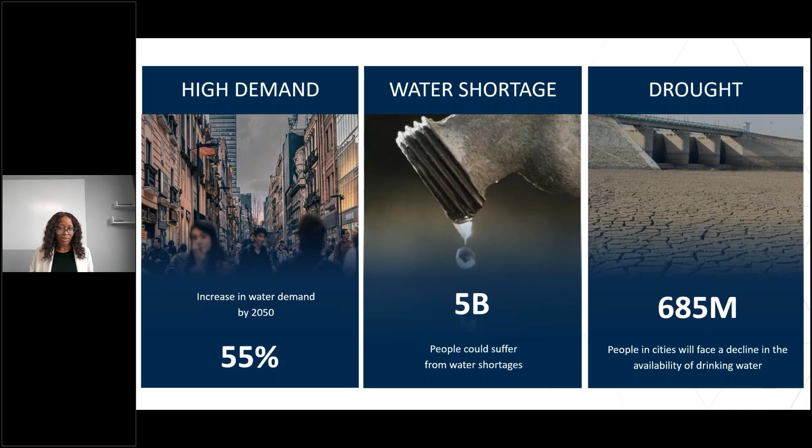We have seen similar situations before. Many people have stored water bottles at home. I also have about 3 buckets of water stored in my home because of that. And we have also witnessed people lining up with buckets in Cape Town due to scarcity of fresh water.

So in South Africa, also floods, climate change, and we've also seen what happened in Hammanskraal with the wastewater treatment plants, because of aging infrastructure. We also have problems with stormwater management and population growth affecting most people. Many existing water systems are outdated and need modernization. And we have rising sea levels, extreme weather conditions, and changing precipitation patterns that impact our water infrastructure resilience.

The increasing population strains water supply and distribution networks. It is crucial to balance water availability, environmental impact, and economic viability, especially with a lot of new residential developments. I've also attached the CSIR link for the latest information about extreme rainfall conditions. Most people are affected, homes collapsed, damaged bridges, and extensive damage to infrastructure, homes, and even vehicles. We've seen that also happening in KZN, KwaZulu-Natal.

The combination of rising costs, an aging workforce, deteriorating infrastructure, and impacts of climate change has made the task of managing our finite water resources one of our great present-day challenges. One that requires intelligent planning and operational efficiency. As an expert in water management, the world is looking to you to get this right.

And whether the challenge is too much or not enough, Autodesk is here to help you manage every drop with comprehensive technology for all your water infrastructure needs. From stormwater to wastewater networks, treatment plants to distribution systems, asset management to data analytics, we can help reduce risk while delivering reliability, dependability, and performance.

By utilizing Autodesk's end-to-end software solutions, you'll find efficiencies spanning all phases of the water asset lifecycle: planning, design, construction, operations, and maintenance. Autodesk's digital modeling tools and cloud-based solutions support increased collaboration, while reducing design time and rework, helping you create, analyze, and manage a resilient water infrastructure more efficiently and with better quality.

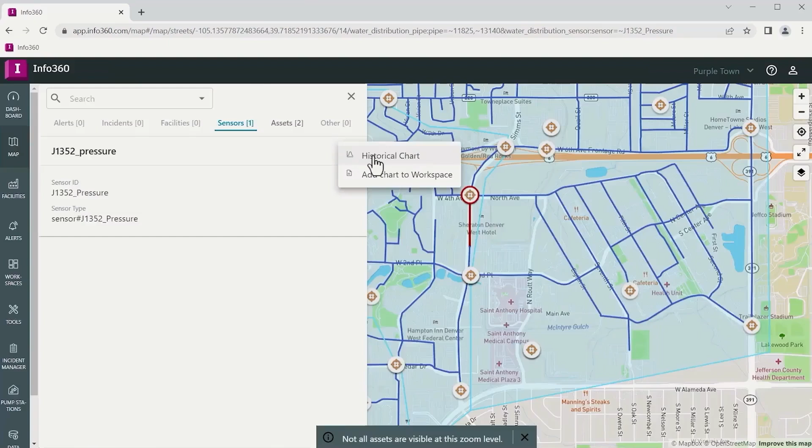Optimize land use with advanced design tools for sustainable drainage. Limit environmental and community impact with improved stormwater and wastewater planning and management. Deliver reliable and safe drinking water through better analysis. Improve operational efficiencies and system reliability through data analysis and optimization. Make informed decisions with streamlined asset condition, risk, and rehabilitation planning.

These comprehensive technologies will help you get better, more desirable outcomes to ensure that water is everywhere it needs to be.

Okay. We have discussed various problems, and I believe we all need a smarter way to manage our water systems. The Autodesk vision platform is to deliver full water cycle, life cycle management for smarter, more resilient and sustainable water systems.

This includes planning, design, construction, operations, and monitoring of our water systems without having to do a lot of rework and making a lot of assumptions in our Excel spreadsheets due to lack of information.

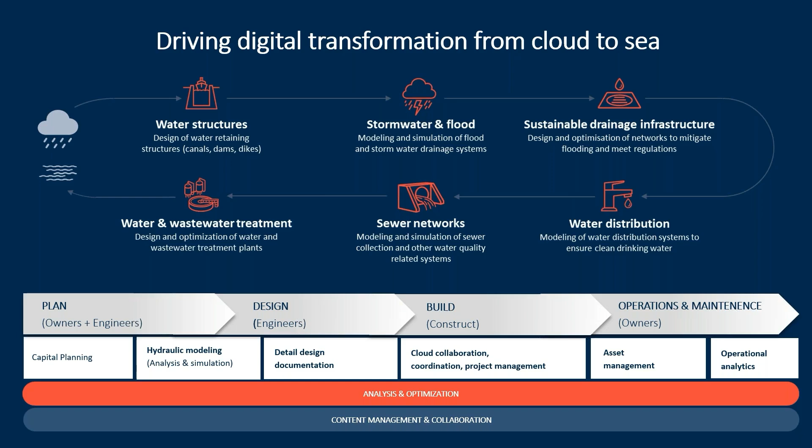With the integration of solutions from Autodesk and the acquisition of Water Infrastructure Solutions, we are now able to cover the entire water value chain, including water structures, stormwater and floods, drainage, water and wastewater, treatment plants, sewer networks, and water distribution. This enables us to support the entire water cycle from planning and design to construction, operations and maintenance, as well as the entire asset life cycle from the single drop of water to digital operations.

And for water structures, our networks and treatment plants, we have a solution through digital transformation. Some of you may be familiar with AutoCAD, Civil 3D, Revit, Inventor, Plant 3D, Navisworks, and even InfraWorks for modeling, designing, analysis, and optimization. However, there is increased collaboration and integration with water solutions and content management.

The key solutions available by each industry: from InfoDrainage for design optimization of networks to mitigate flooding and to meet regulatory requirements. We have InfoWorks ICM for modeling and simulation of floods and stormwater drainage systems and sewer collection systems. We have InfoWorks WS Pro and InfoWater Pro for modeling water distribution systems to ensure meeting service levels and delivering clean, potable water.

We also have another key solution, which is Info360 Asset, for analytical risk-based management for water and even sewer networks to reduce operational risks and capital costs.

I'll start with the first key solution, which is InfoDrainage. This is Autodesk software for urban drainage design and analysis, enabling engineers to simulate and optimize drainage systems. And when you hear about InfoDrainage, just think about drainage and design optimization of networks, mitigating flooding, and even meeting regulatory requirements. You can do full design and analysis with intuitive controls, and you have clear visuals to deliver sustainable, cost-effective, reliable, and compliant drainage designs.

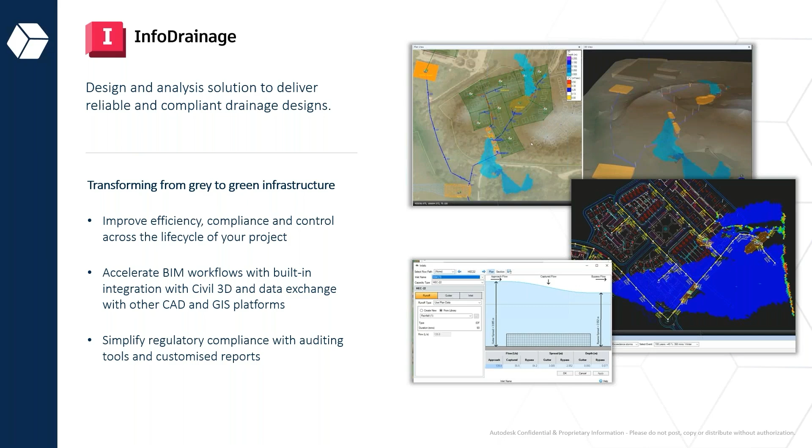This improves efficiency, compliance, and control across the life cycle of your project. It simplifies compliance, and it also has integration with Civil 3D and data exchange platforms like GIS.

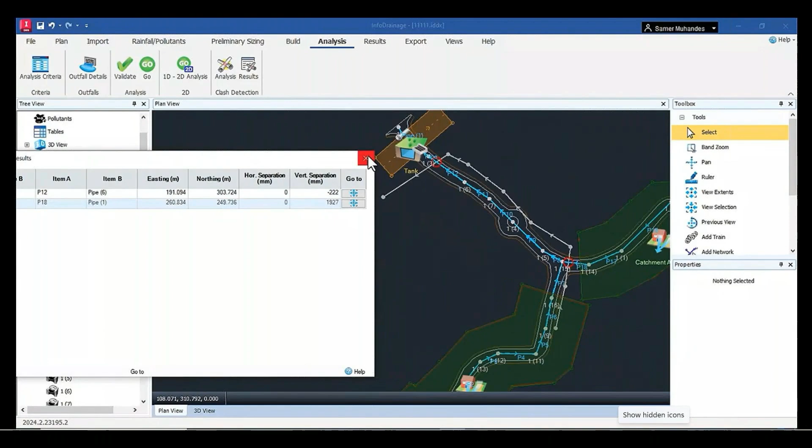You can also do clash detection: have your model, ensure all the relevant components of your drainage system designs are included in the model, verify that the model is up to date and accurately represents the design, access the clash detection tool, and set all your parameters. After setting that, you can just run the clash detection, and this tool will automatically identify and highlight clashes where the separation values fall below the set threshold.

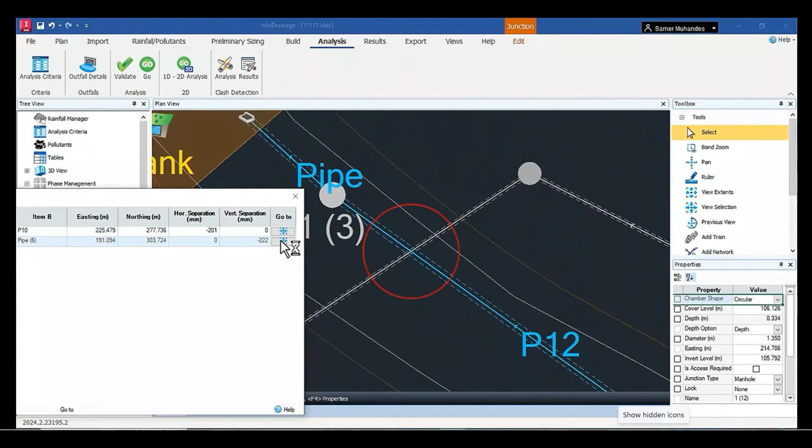You can also just view your results, examine the identified clashes, and visually highlight all the conflict points, making it easier to spot all the issues. After you spot the issues, you can generate your reports. You can include the clash detection results in the audit report for detailed assessment of your design.

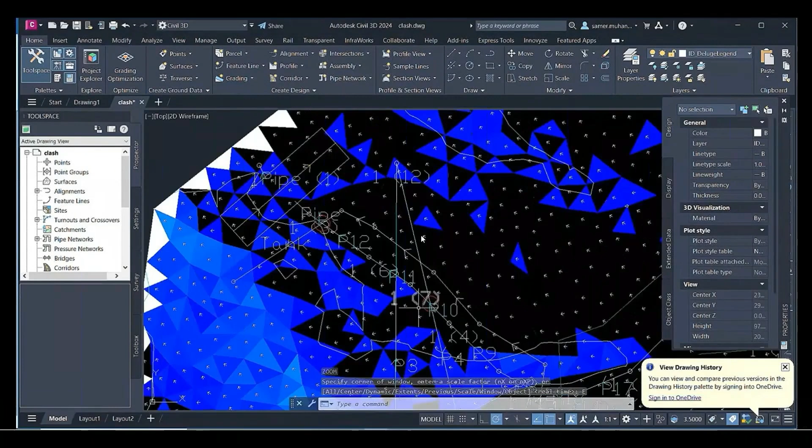And optionally, you can also take your model and export the location of detected clashes to Civil 3D for further spatial analysis, and you can also have your layers set as clash detection in your Civil 3D.

I'll now move to flood analysis, where you can ensure your drainage system model is complete and accurate, including all the relevant components like pipes, manholes, and catchment areas. And you can set up your 1D to 2D analysis, where the 1D engine calculates flows in pipes and structures below ground, while the 2D engine predicts flood flows across the surface.

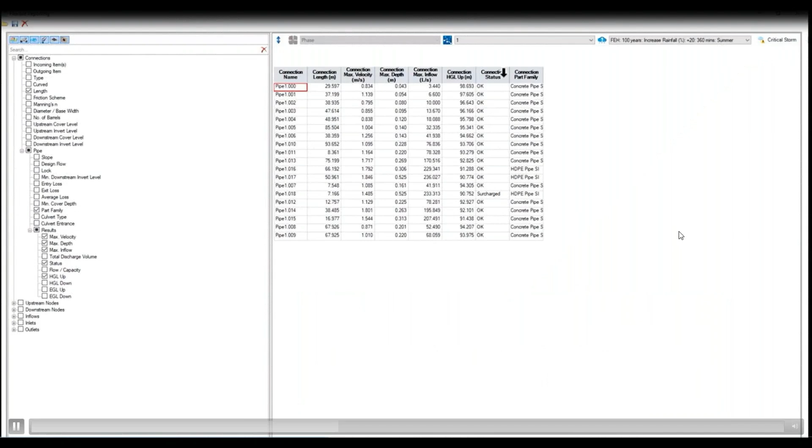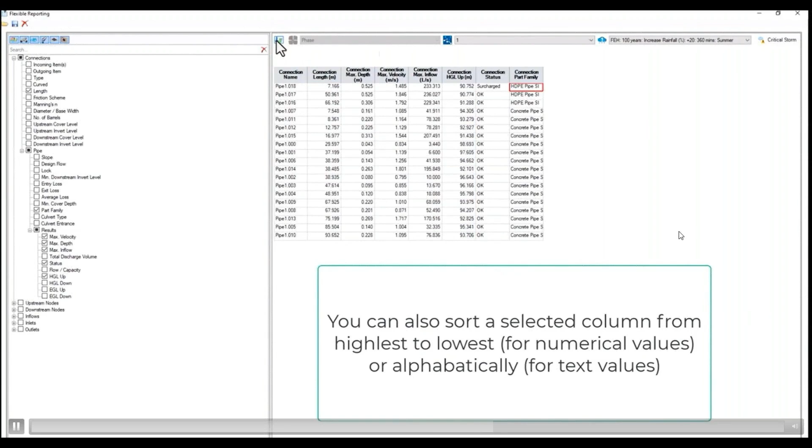You can define all your simulation parameters, set up the rainfall events and return periods you want to analyze, and critical storm. And you can just run the simulation. You can review the results, and you can create detailed and flexible reports of the flood analysis results. These reports can also include maps, graphs, tables to help communicate findings to the stakeholders, and even for future reporting. And all the information will be stored, your inlets, outlets, your orifice diameters also.

I'll now move to our second key solution, which is InfoWorks ICM. When you see the term ICM, just think about integrated catchment modeling. This is an integrated catchment modeling solution for simulating and predicting flood risks, water quality, and even management. You can do your modeling and simulation of floods, stormwater drainage, and even sewer systems.

It's an advanced integrated catchment modeling technology that helps plan for emergency scenarios such as floods and wastewater spill risk, system expansion, and capacity improvements. You can plan, model, and forecast systems to prepare for extreme weather conditions. In Dubai, they have a red weather alert and emergency response team, meaning whenever there is an emergency, it's communicated to the communities, and they can take all the measures that they need to.

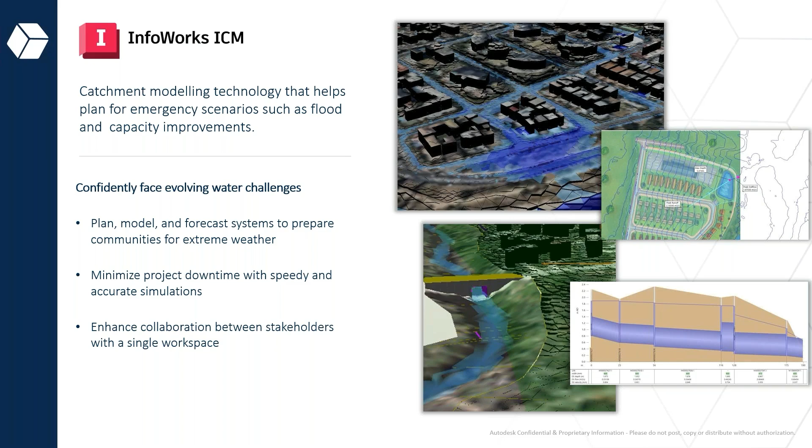It minimizes project downtime with speedy and accurate simulation, and it also enhances collaboration between stakeholders, and you can even work within a single workspace. InfoWorks ICM is also used for modeling complex hydraulic and hydrologic systems, integrating both urban and river catchments, allowing for comprehensive simulations of water flow and behavior in various environments.

And you can also do scenario management, which allows you to create and compare multiple what-if scenarios within a single model. This feature is particularly useful for assessing the impact of different parameters like buildings, mesh zones, roughness zones, and conditions on a network without needing to create separate models for each variation.

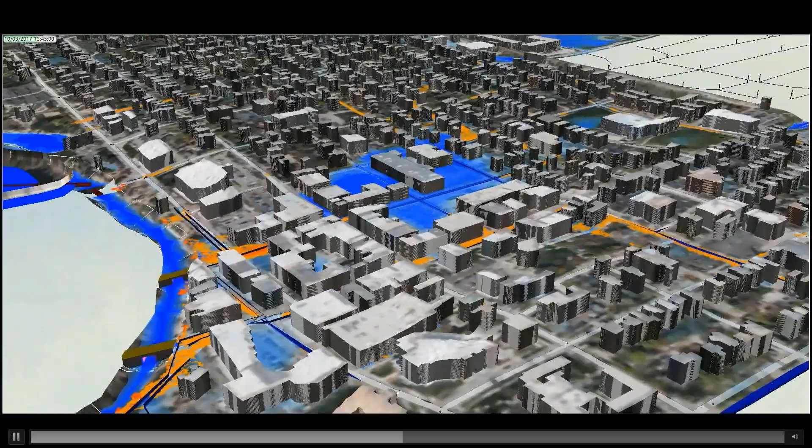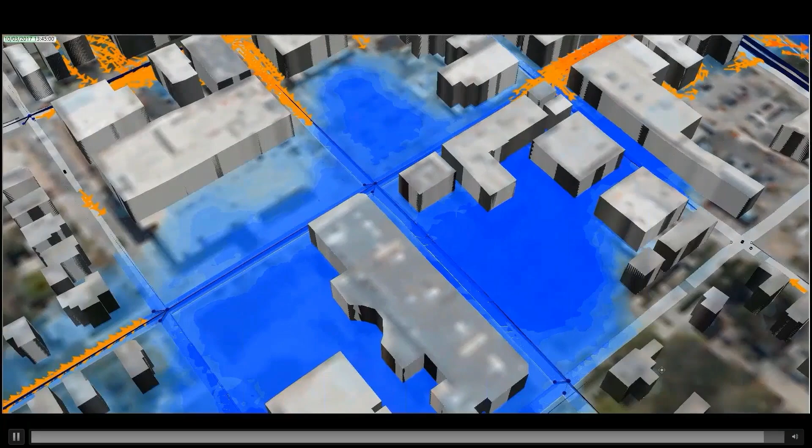There is also collaboration between InfoWorks ICM and InfraWorks, which is part of the AEC collection tools. It enhances the capabilities of both tools by providing a comprehensive solution for water infrastructure planning and management. And it provides seamless data exchange between the two platforms, allowing for efficient updates and modifications, meaning you can work with InfoWorks ICM and also take your models to InfraWorks to visualize and get a comprehensive view of what you're planning, the infrastructure, and even how to manage it.

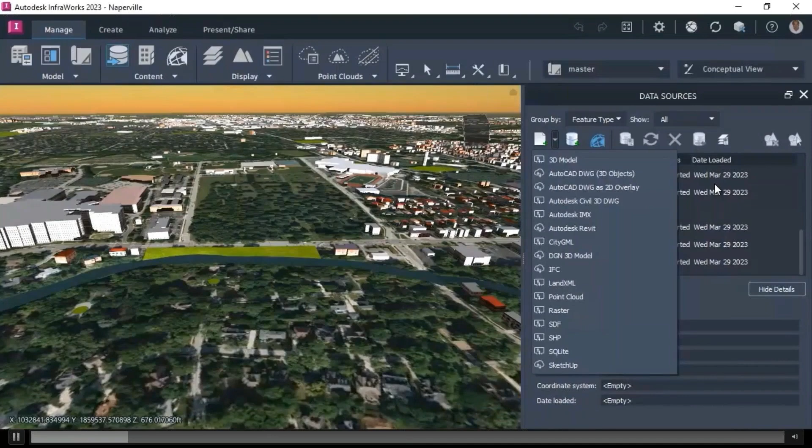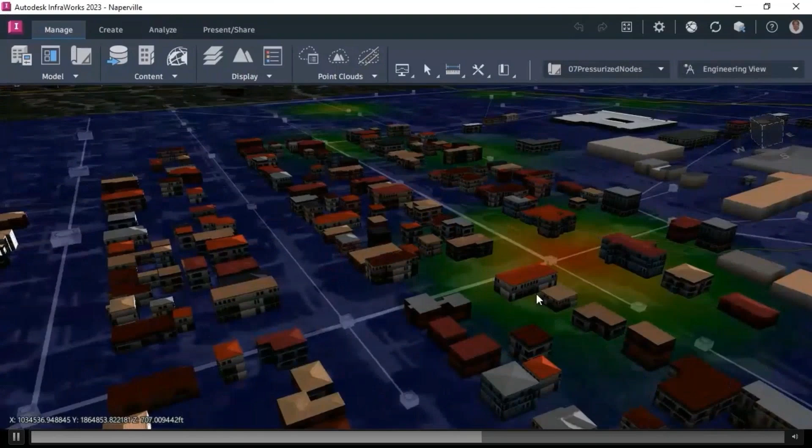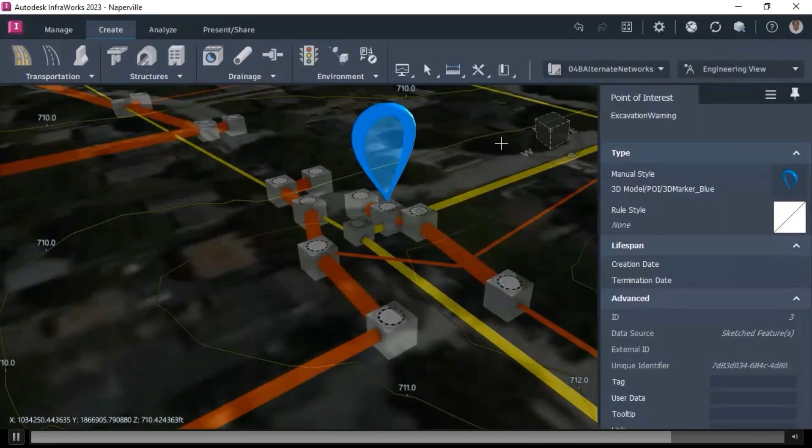And you can also export your files, such as your shape files. You can export to InfraWorks, and from InfraWorks, you can access your files. After getting your files to your model, connect to ArcGIS as a guest, or if you have an account, go to your content, choose your storm and water distributions, and from there you have dynamic visualization, and all the changes made in InfoWorks ICM are reflected in InfraWorks, ensuring consistency across the models. And what you do on the other side using InfoWorks ICM can also be reflected and shown on your model in InfraWorks.

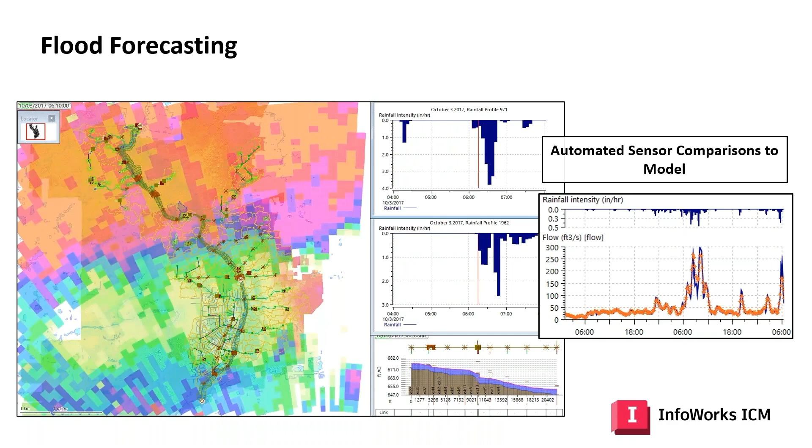And with ICM, it also removes all the tedious data processing to get meaningful results faster by automated sensor comparisons to model, meaning all the information that's not necessary or very tedious, it will just remove it and automatically compare between the right one and the wrong one for you. And lastly, ICM also has a very special and holistic approach, which allows you to track data integrity and automate correction.

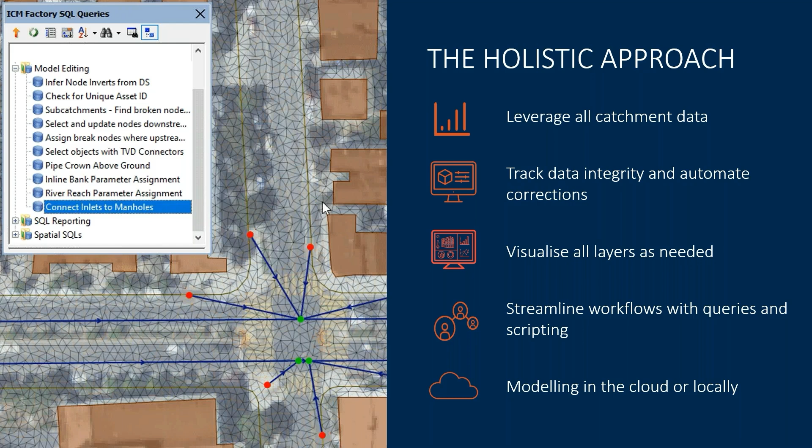You can also visualize all the layers as needed, and you can model in cloud or locally and leverage all your catchment data, and even your workflows will have all the queries and scripting, and you can just send it to the relevant department so that they can just see what's being done. So I find it very special that it can do all those things for us.

And now I'll move to our third key solution, which is our InfoWorks WS Pro. When you see WS, think about water supply. So this is a comprehensive solution for water supply and distribution, for network modeling, optimization, and it is a collaborative hydraulic modeling software to improve the reliability of water distribution networks and maintenance of service levels while ensuring water quality and increased customer satisfaction, meaning it ensures that you're meeting all the service levels and delivering clean and potable water to communities.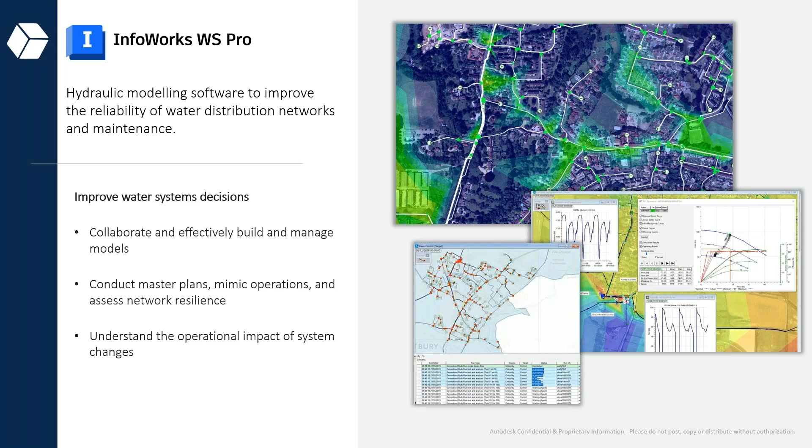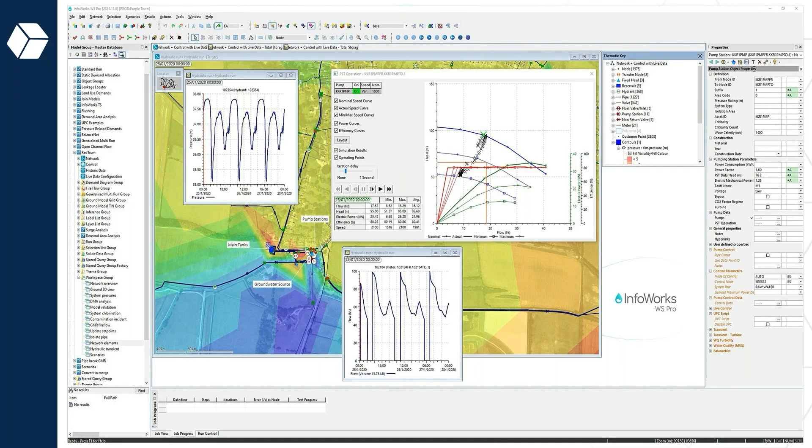So you can collaborate and manage your models, you can conduct master plans and assess network resilience, and everyone can be able to understand the operational impact of all the system changes. You can also allocate demands in InfoWorks WS Pro, which involves assigning water usage requirements to specific nodes within a network, and this process ensures that the model accurately reflects real-world water consumption patterns.

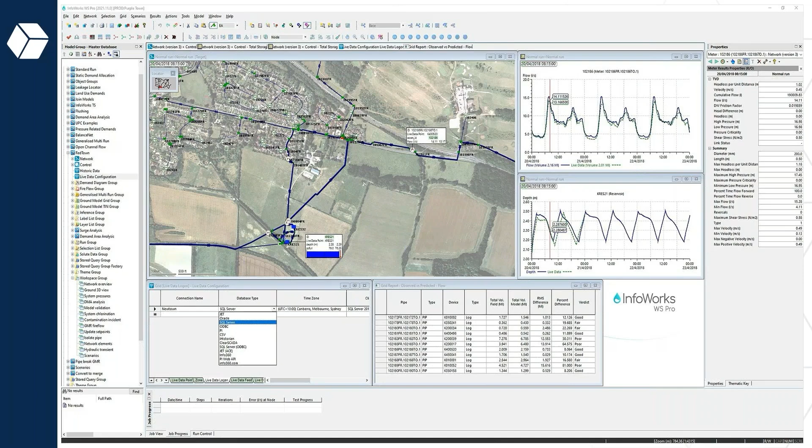And you can also automate your connections, which I find very cool, because after the demand allocation, you can now just automate the process of assigning water demands to nodes based on customer data or land use information. So you can check all the pipes, even the type, the volumes, total volumes, and just be able to allocate it and automate it to where it's required.

Sorry, you're audible now.

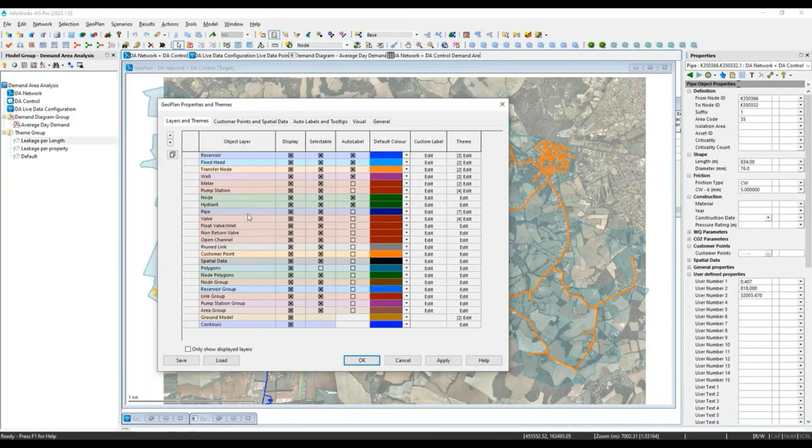Okay, so you can just check all the areas that are affected and highlight the areas where the demands are not being met, and you can even highlight all the areas that are being affected. You can just go there and automate it.

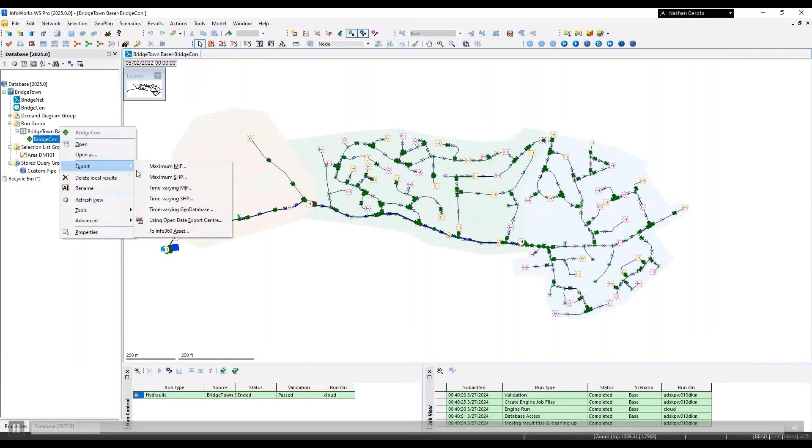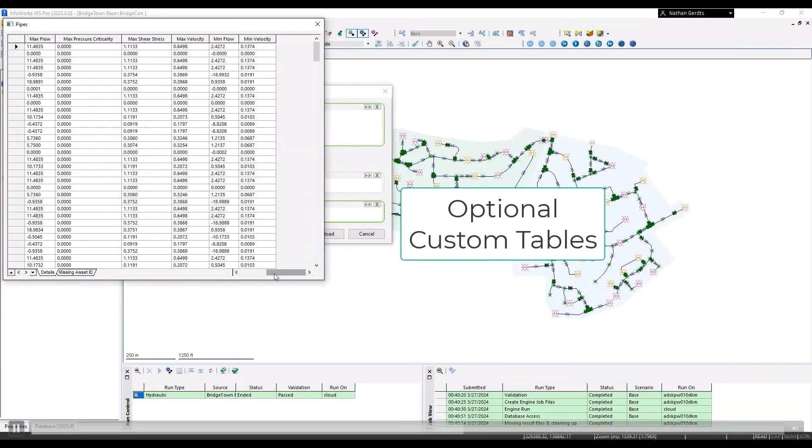And lastly, you can do asset management. With asset management integration, it gives you the ability to manage and to maintain water distribution networks effectively by simulating operating conditions and even risk analysis. So you're able to filter all the areas, even the pipes, everything, the table, you'll get it with the maximum flows, minimum flows, and you can just run and check if your model is actually operating well,

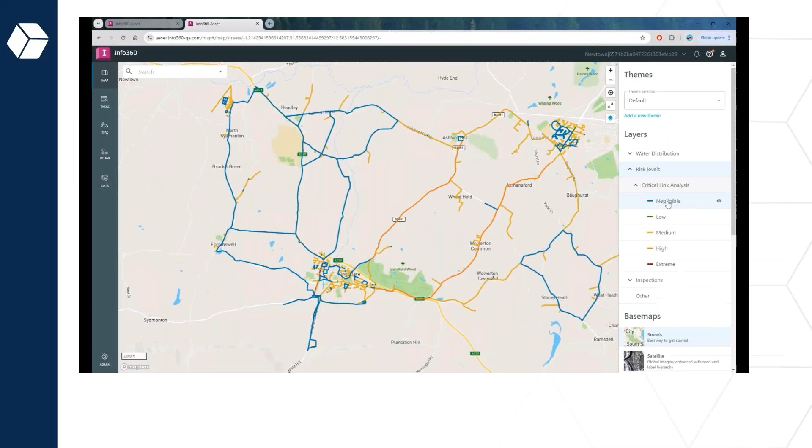and if there is any risk that you're experiencing, you're able to analyze it and you can send it to your team if it's critical, medium, or even extreme. Maybe it has to be fixed at that moment. You can just put it as critical and extreme so that they can prioritize it.

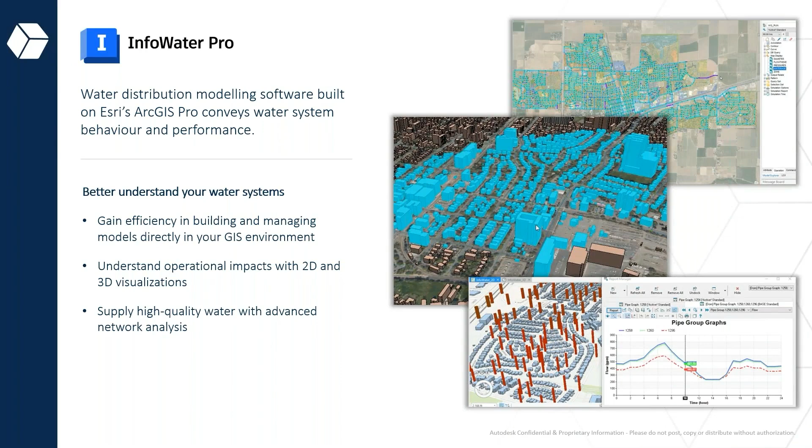I'll now move to InfoWater Pro, which is a geospatial water distribution network modeling and analysis tool for simulating and optimizing water supply systems. With water distribution modeling, InfoWater Pro is built on Esri ArcGIS. It conveys water systems behavior and performance within geospatial context. You can do modeling of water distribution systems to ensure meeting service levels and delivering clean potable water.

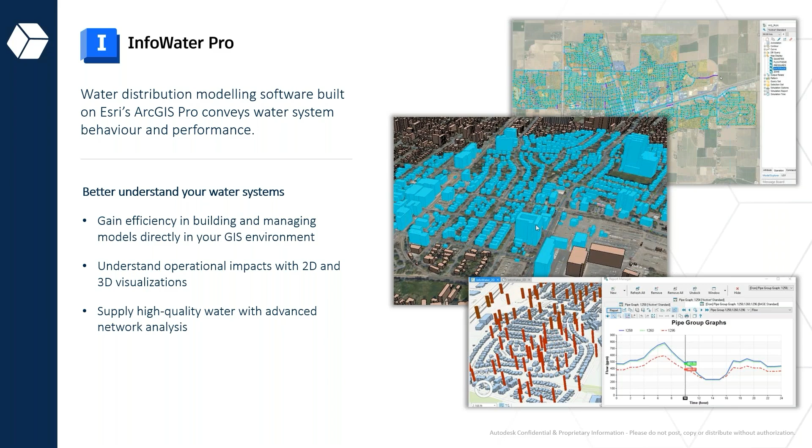And you can also supply high quality water with advanced network analysis and also gain efficiency in building and managing models directly in your GIS environment. You can have your automated pressure zones. You just make your settings and check where you want to optimize it. Maybe you can select to automate all the pressures with, let's say, 5 bars, and you can run the simulation, check if it's going to work, if it's going to fail, and from there you can have it in graphs or images. You can also have workflow visuals and even schematics.

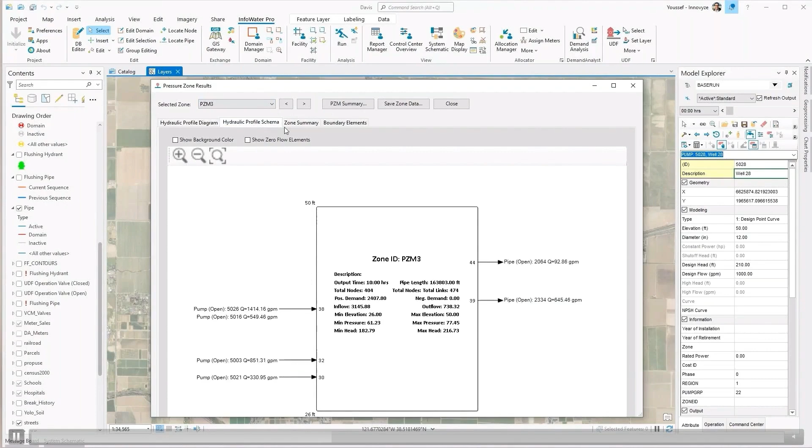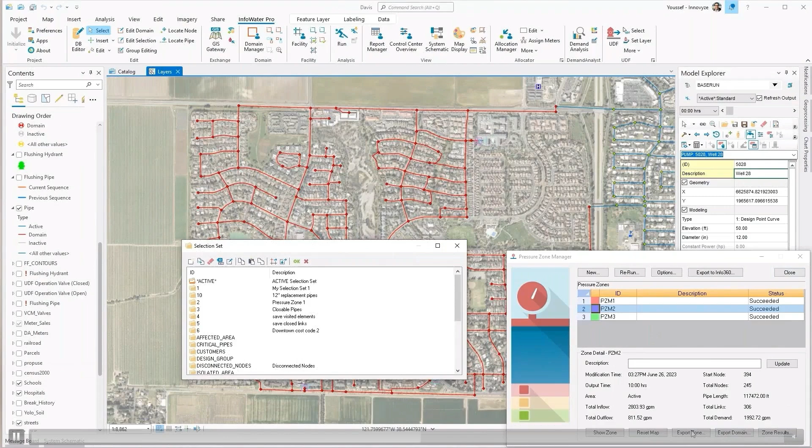So after having your zone or zone ID, now everybody can see the information at that time where you automate it, and you can group them and select them according to their levels or even the flow at that portion or even the pipes they are connected to, and you can just visualize. You can use schematics to do that.

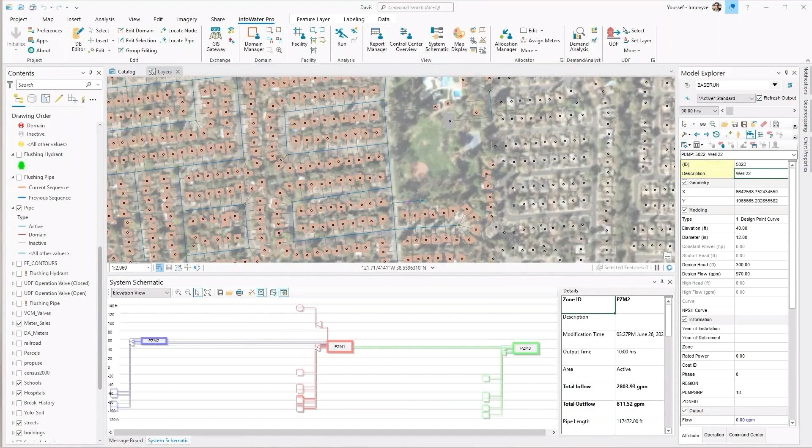You can also assign colors, so if it's red, maybe it's a priority, you need to fix it. Maybe the green means it's working perfectly fine, and all the people could know that and be able to visualize what's the length, the area, even the output time at that area that you have. So you can just do that. Everybody can get all the information they want without having to view the whole model.

And now I'll show you how to do your fire flow cloud simulations just by computing scenarios in the cloud, analyzing scenario results, and even getting graphs, images, workflows, visuals, and even reports.

So you can just run all of them. If it's succeeded, it will give you the status as succeeded. If it's not succeeded, it will be maybe in progress or still running, and everybody can always go back, run them over and over, check if they're working or not,

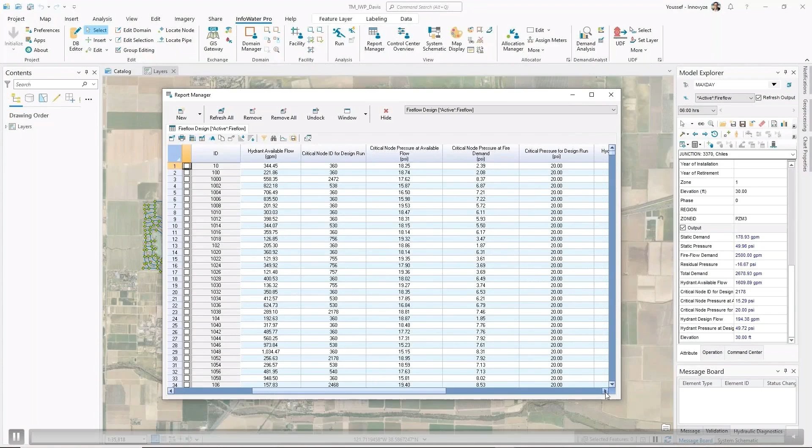and just be able to automate everything, visualize it, and even put different scenarios to test if it's going to fail or work using certain pressure conditions and even the node pressures at that point. And if it's an emergency or it's inactive, you can just assign it to your team to be able to know that.

And lastly, I'll talk about valve criticality. Think about what happens if there was no water in the taps for a very long time and you're just trying to open the tap, there is that air that's coming out, right? And also think about if you shake a cold drink before you open it, what happens to that cold drink?

So I read an article talking about human factor engineering, which involves applying what we know about human capabilities, limitations, and characteristics to design. It can be defined as setting people up to succeed: design that takes account of human factors will reduce human error. This has several consequences.

The person is sometimes unable to access the valve when required during operation. This is an issue if the valve has to be operated quickly. For example, in order to control an incident that is escalating, such as a leak or fire, it can be a problem. And sometimes a person may even injure themselves while trying to access the valve.

So with InfoWater Pro, you can prioritize maintenance for critical valves. You can enhance network performance, improve network design quality, and better workflow efficiencies and proactive, meaning you can just work with that sitting at your office.

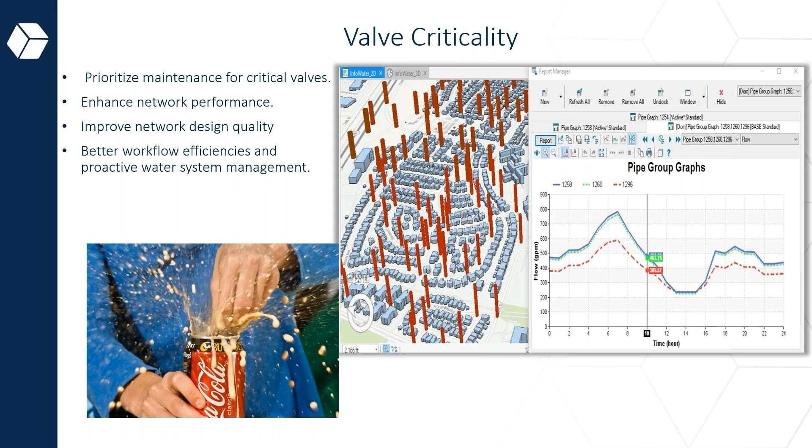You don't have to send the operations team to site to fix that, because you can check all the valves that are critical, what's causing the criticality, and even the emergency. If something happens, you can make all the settings so it can work and perform better, and nobody has to injure themselves going to site trying to access that valve in case of emergency.

So we've now covered our key solutions, which are InfoDrainage to optimize your design networks, mitigate flooding, and meet regulatory requirements. We also addressed InfoWorks ICM, which is mostly for your storms, sewers, and floods. We also spoke about InfoWorks WS Pro and InfoWater Pro for water distribution and other criticalities.

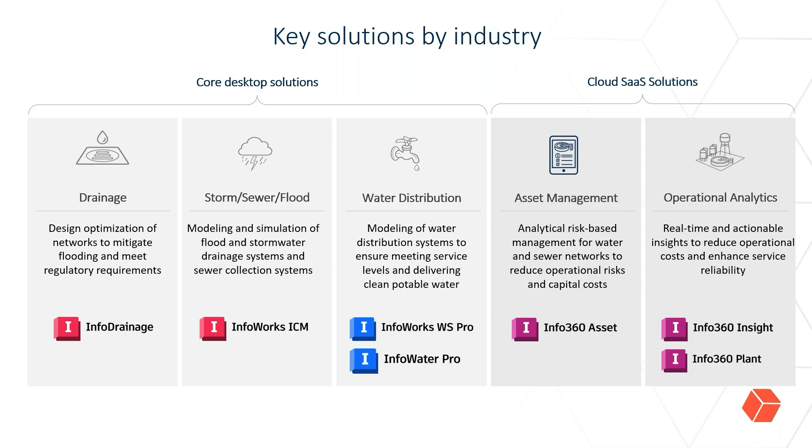So now we'll move to Info360 Insight, and Plant for our asset management and operational analytics. This will help us improve design analysis, enhance our collaboration, and even our data management.

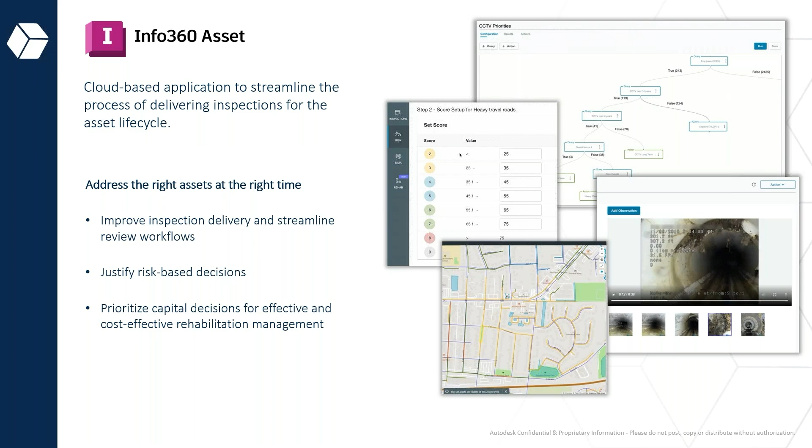So I'll now move to Info360 Asset, which is a cloud-based application to streamline the process of delivering inspections for asset capture, condition assessment, risk management, and capital planning prioritization. It justifies risk-based decisions, improves inspection delivery, streamlines review workflows, and also prioritizes capital decisions for effective and cost-effective rehabilitation management.

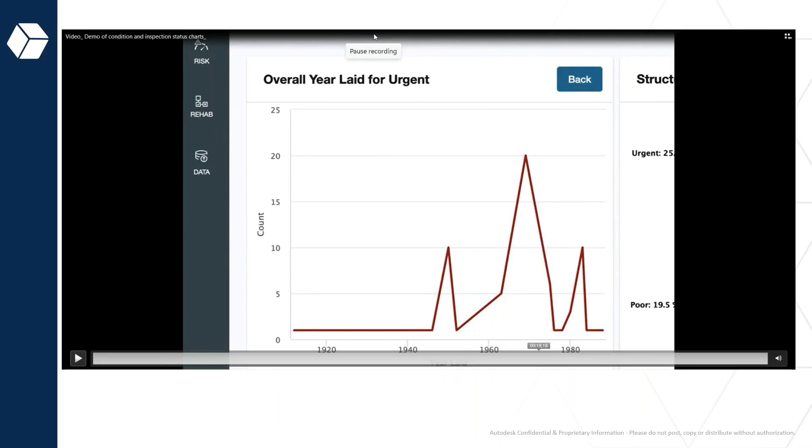You can also do condition and inspection status checks, meaning you can get on your model and check if there is something that you need to fix urgently, or something that's working just fine, and see how your assets are working so that you can plan for maintenance, whether you need to fix something now or have a 5-year plan on how to fix it. So you're able to go on your system and check and inspect that status.

And you can also have everything in one table, all the tasks, all the networks, if it's risky or at rehab, and you can even assign it to your team members and the groups that have to do the inspections, and they can have their tasks allocated to them.

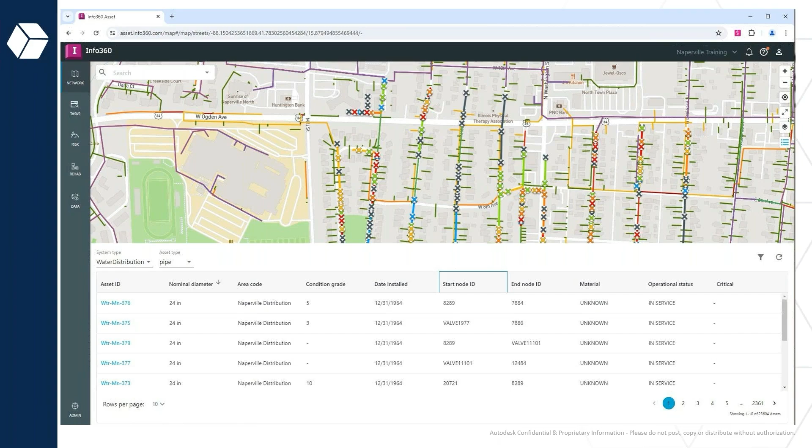And if it's something urgent, a certain group can go and fix it and have their notes and comments, and even say it's at risk, maybe it has to be fixed within this duration. So you can have that with all the areas, even the notes, whether it's critical or not critical.

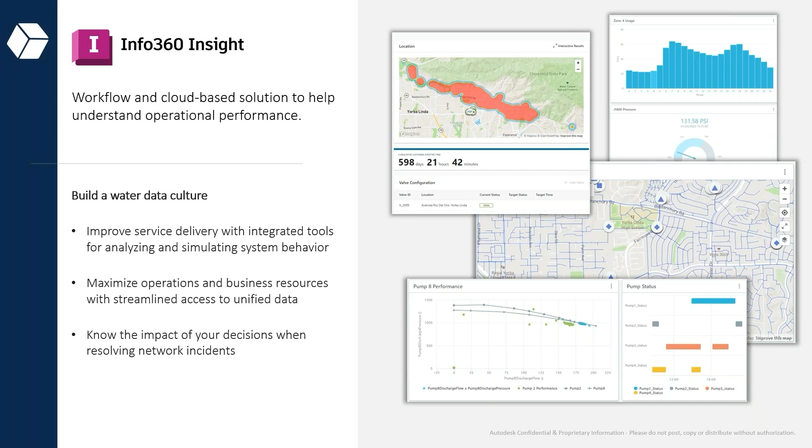I'll now move to Info360 Insight, which is a workflow and cloud-based solution to help understand operational performance with business intelligence for quick identification of incidents, rapid solutions of emergency scenarios, and simplified compliance reporting. So this improves service delivery, and you know the impact of your decisions when resolving network incidents, and it also helps for future planning and maintenance, and sometimes you can even identify the incidents before they happen so that you can solve them.

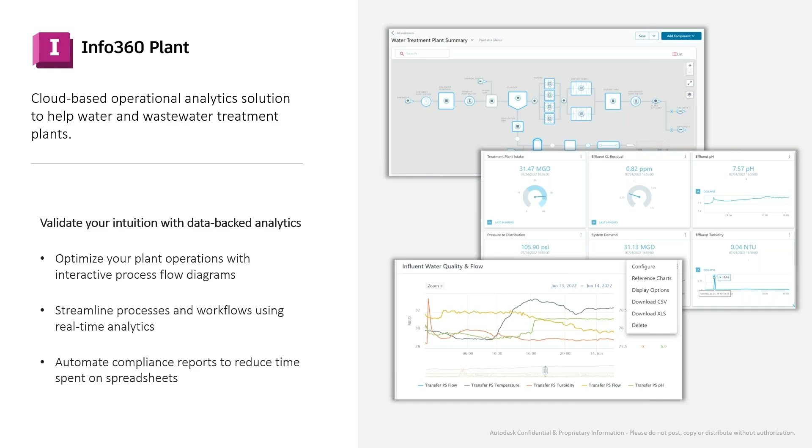I'll now move to Info360 Plant. It's a cloud-based operational analytics solution to help water and wastewater treatment plants improve real-time data analysis. It enables workflows associated with performance, compliance, and even improvement planning. So you can streamline processes and workflows using real-time analytics. You can automate compliance reports to reduce time spent on spreadsheets. And you can even optimize your plant operations with interactive process flow diagrams, and everybody can work on it using that.

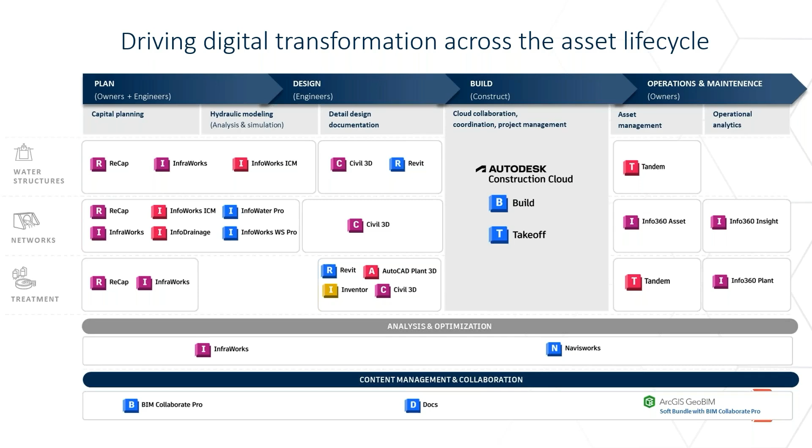So for each of these applications, we have a solution for water structures, for networks, for treatment plants. We have solutions for all of them. And in closing, I just want to tell you that we have powerful solutions to tackle all these water infrastructure challenges that we're facing. And with all these advanced tools, we can now assess flood risks, evaluate valve criticality, and even explore various scenarios.

In closing, we have powerful solutions to tackle all these water infrastructure challenges. Automation of models ensures the maintenance of water quality and effective asset management, and there is integration and collaboration with other Autodesk software like Civil 3D, Navisworks, Revit, Inventor, Plant 3D, and InfraWorks to enhance our capabilities even further by using all these key solutions for planning, design, construction, operations, and maintenance, so that we can be well equipped to create resilient and efficient water infrastructure systems for the future.